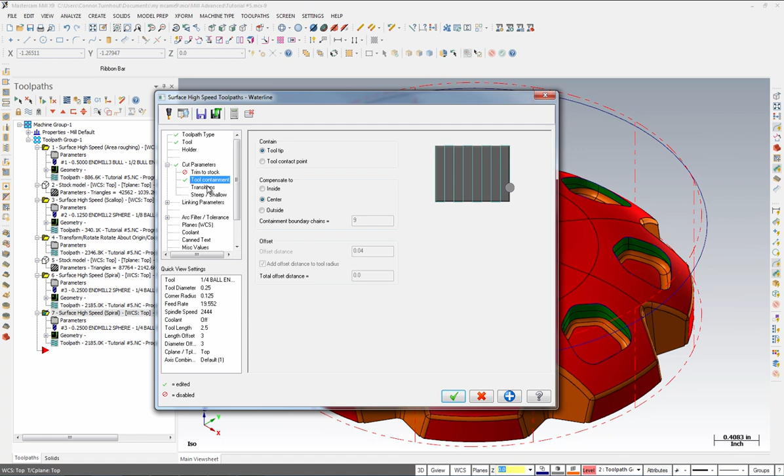compensated to the center. Select Transitions and make sure that these align to that of your training tutorial before moving on. Go over to the side and select Steep/Shallow. Change these values here in the Z depth to -0.35 and make sure that the maximum depth is -1.1 and hit Enter on your keyboard.

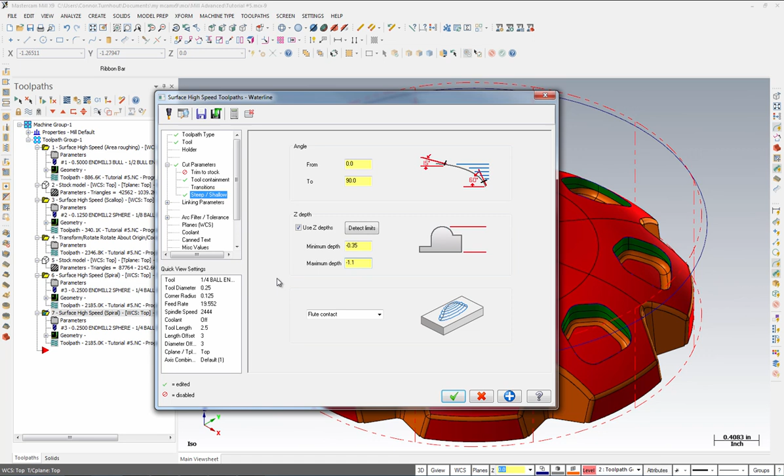When this is done, come over to the left-hand side and select Linking Parameters. In Linking Parameters, make sure that all this aligns to that of your training tutorial. Come up to the top here and select Minimum Vertical Retract and change it to Full Vertical Retract. When done, select OK. Select the Regenerate All Dirty Operations. Your toolpath should look like this.

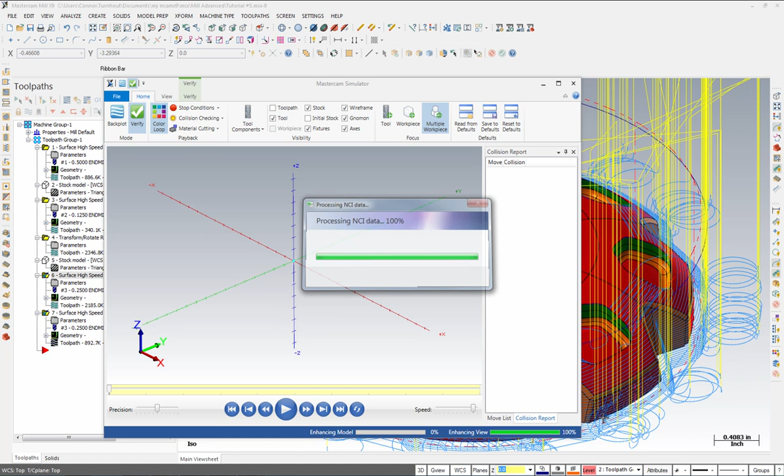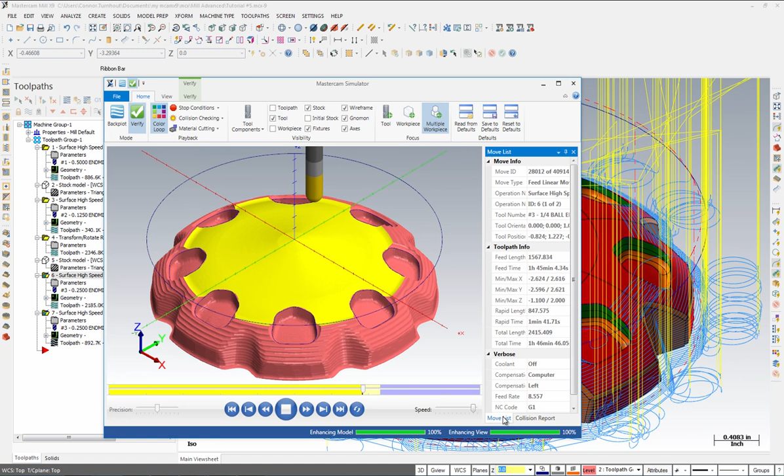Highlight folders 6 and 7. I'm holding down Shift on my keyboard and selecting folder 6. And go to your backplot and verify. To save time, I'm just going to select the verify. However, this time, I'm going to select play as opposed to end. Your part should look as shown.

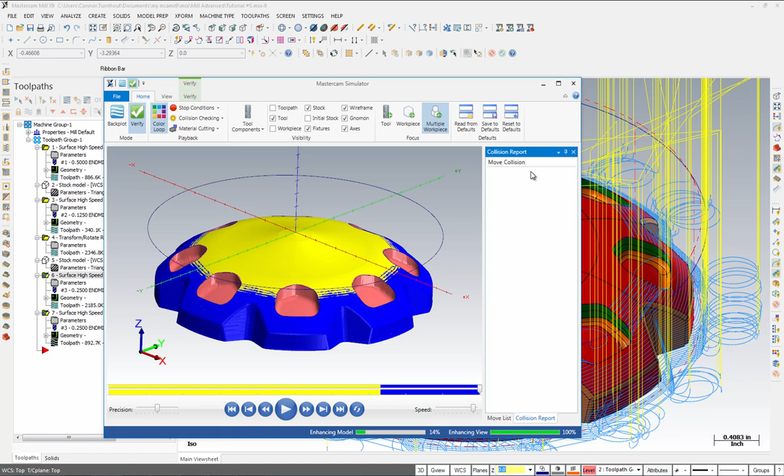To double check, I'm also going to select the collision report and make sure that there are no collisions, which there aren't. Come up to the top and select Close. From here, we're going to go ahead and highlight all of our operations and post the file. Select OK.

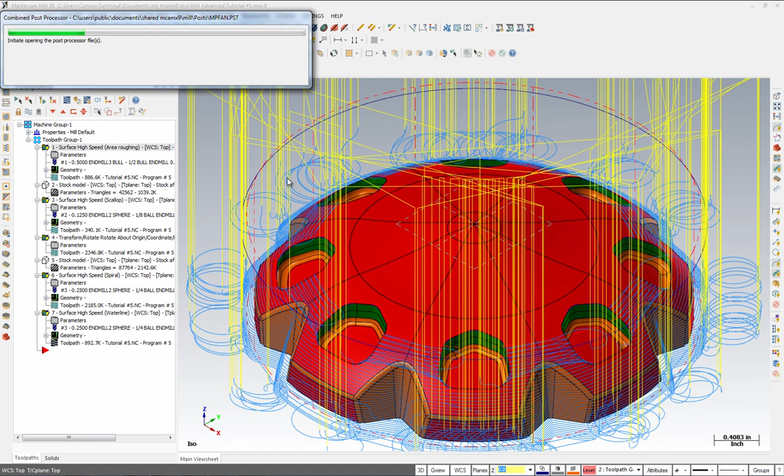Save this in a location where you can find it. I'm naming mine Tutorial Number 5. This will load up your Code Expert in Mastercam. Your G-code will be listed on the side. Once you are happy with this, come up to the top and select Close. Toggle your toolpath displays and select the Save button. Congratulations! You have just completed tutorial number 5 in the Mill Advanced Training Tutorial series.